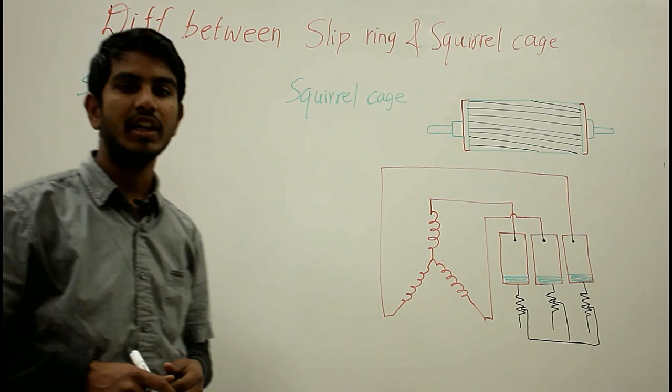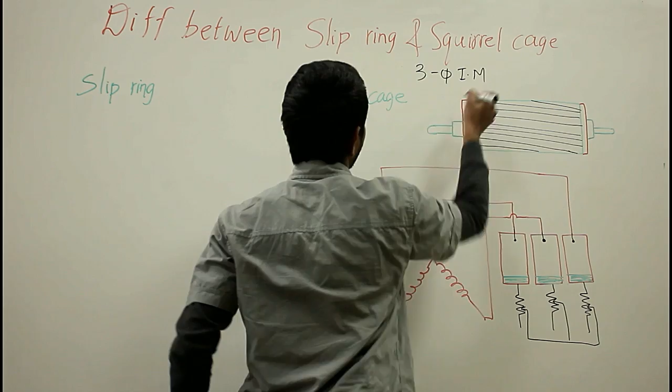Hello friends, in this video let us discuss the differences between the slip ring induction motor and the squirrel cage induction motor. If you look at the basic construction of the slip ring rotor and squirrel cage rotor, three-phase induction motors, depending on the type of rotor used, are classified into two types. One is the slip ring type of induction motor and the other one is the squirrel cage type of induction motor.

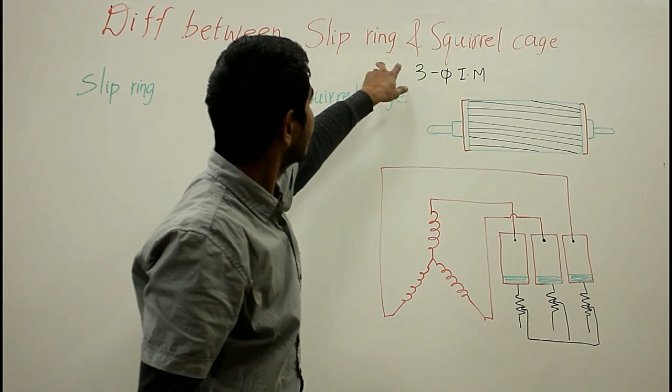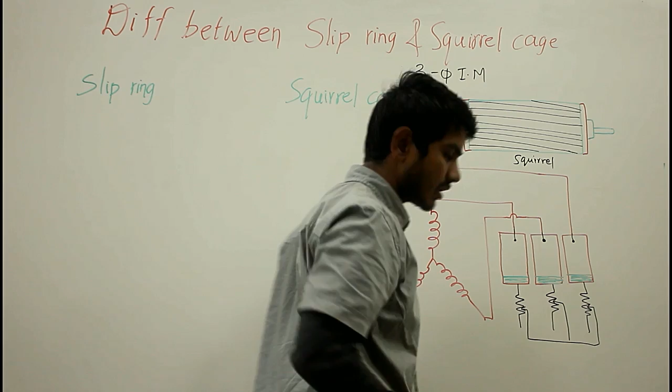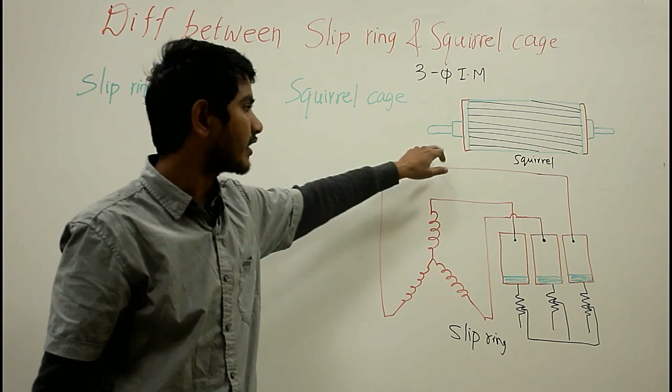Now, based on these two rotors, our induction motors are classified. If you look at the very basic construction of these two rotors, this is your squirrel cage type of rotor and this is your slip ring type of rotor. So if you are employing a squirrel cage type of rotor for your motor, it is referred to as a squirrel cage type of induction motor, and if you are employing a slip ring type of rotor, it is referred to as a slip ring type of induction motor.

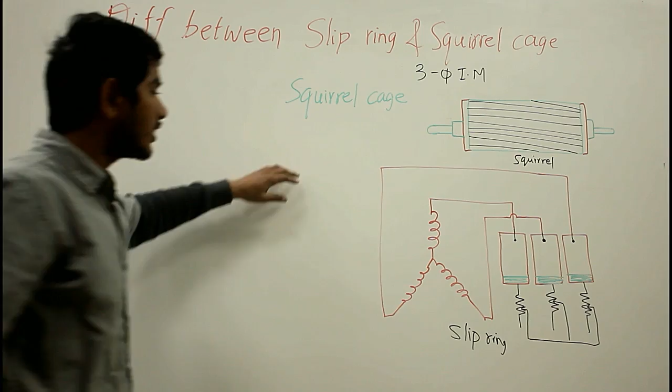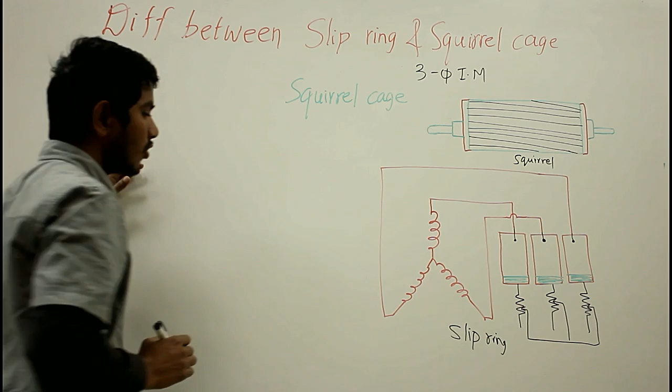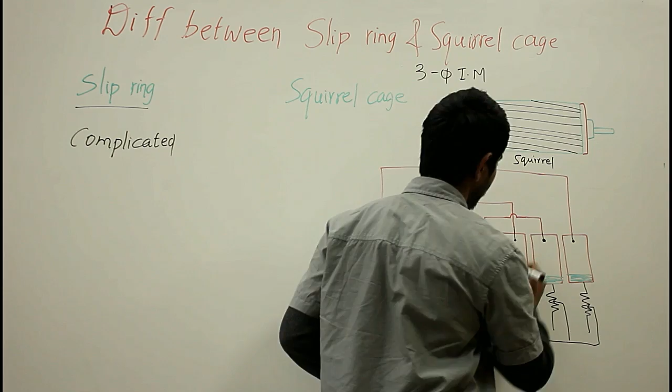Now let us discuss the basic differences between the squirrel cage type of induction motor and the slip ring type of induction motor. Generally in the slip ring type of induction motor, the construction is complicated because of the presence of slip rings. If you look at the parts of the rotor used for the slip ring type of induction motor, here you have three slip rings, and this green part represents your carbon brushes. So the construction is complicated because of the slip rings and the brushes, and here the construction is simple and rugged.

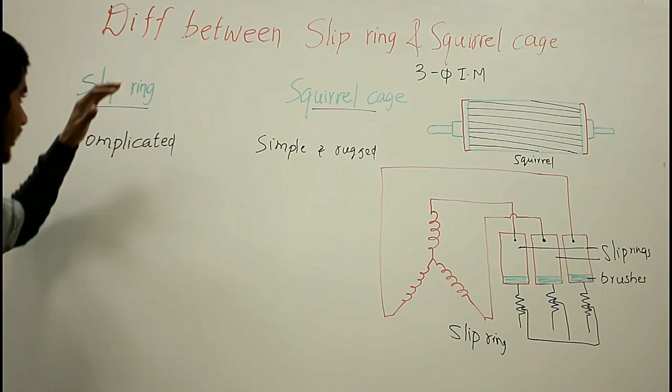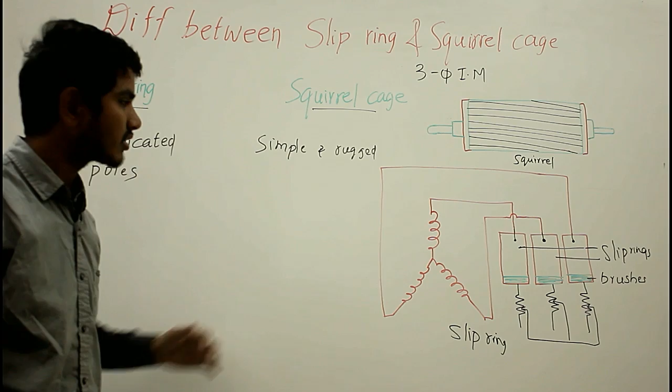In the slip ring type of induction motor, the rotor is wound for the same number of poles as that of the stator, but in the squirrel cage type of induction motor, the rotor automatically adjusts to the poles of the stator.

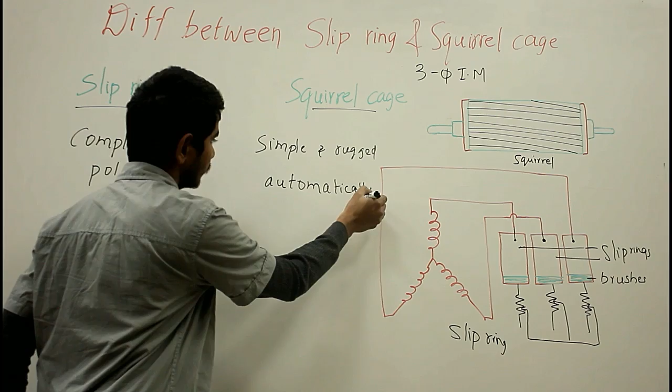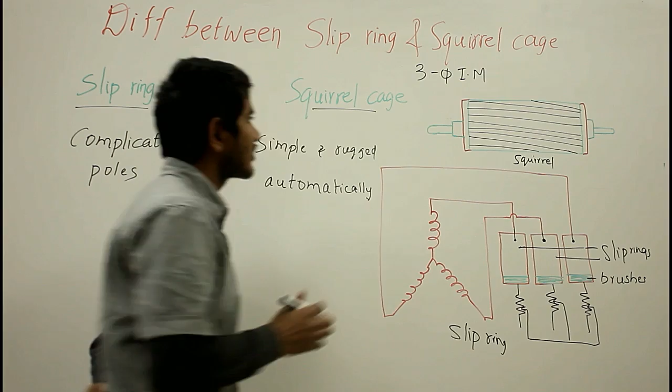Generally in squirrel cage motors, the three-phase windings wound in the stator are delta connected, because mostly the starters used for squirrel cage type of induction motors are star delta starters. Hence, the stator of your squirrel cage type of induction motor is delta connected.

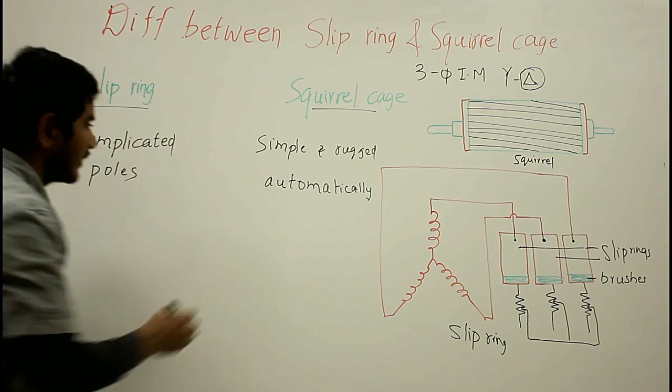So for both types of motors, that is the squirrel cage type of induction motor and the slip ring type of induction motor, the stator part is the same. The parts of the stator are the same; only based on these two rotors we are classifying the induction motors, and the stator remains the same for both motors.

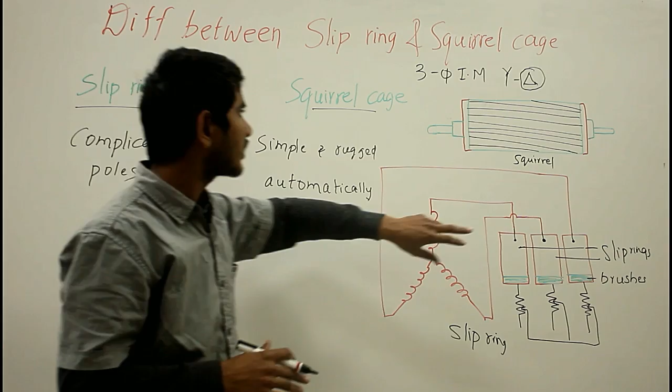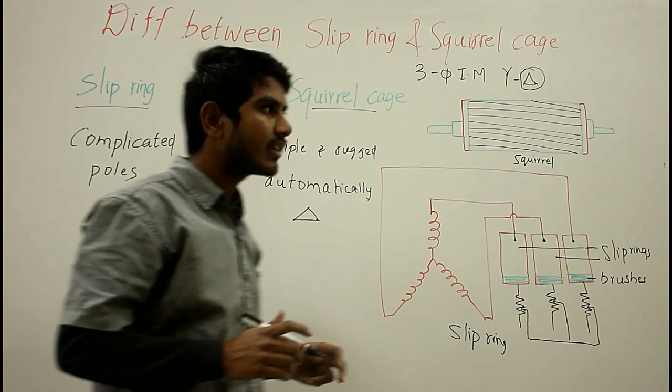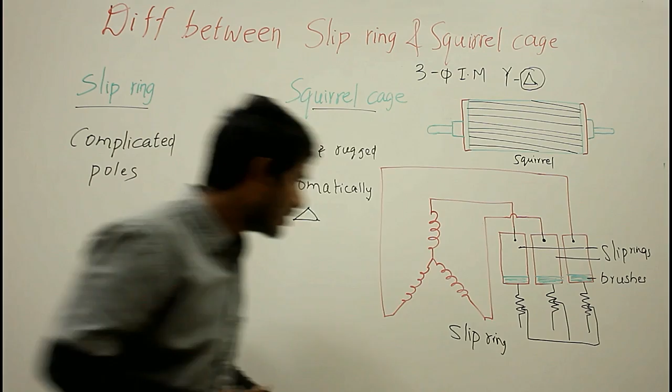But depending on the type of starter, the windings can be delta or star connected. Mostly for the squirrel cage type of induction motor we go for star delta starters, and hence your stator is delta connected to reduce the high starting currents. For the slip ring type of induction motor, the starting can be done by employing external resistances, so your stator can be either delta or star connected.

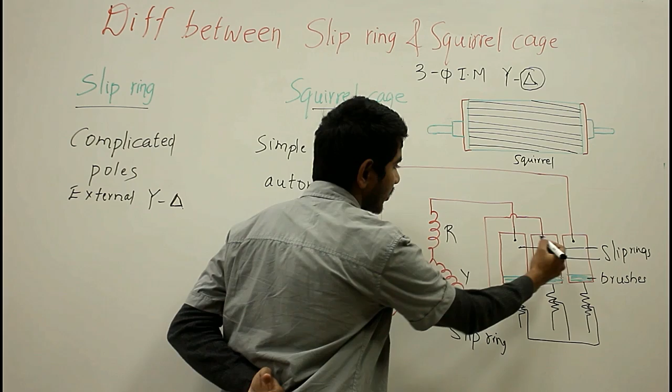In the slip ring type of induction motor, as the name suggests, the rotor windings are permanently connected to the slip rings. And if you look at the squirrel cage type of motor, the slots are slanted in order to prevent magnetic cogging, that is, magnetic locking between the rotor slots and the stator slots. They are slanted, meaning they are neither perpendicular nor parallel to the axis of the shaft. They are oblique in angle.

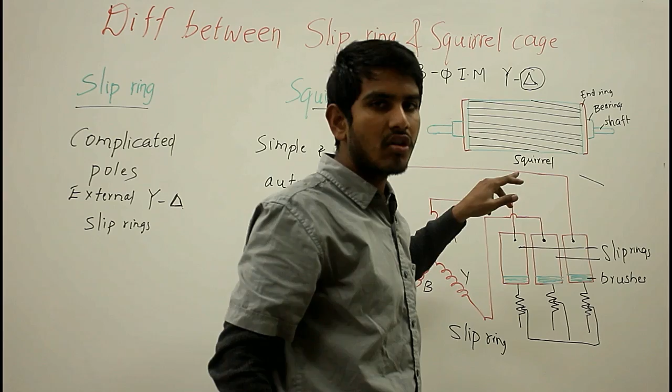So this is your shaft, and here are your bearings to support the rotating shaft, and this is your end ring, and here are your slanted slots, and in those slanted slots we use aluminium, brass or copper bars.

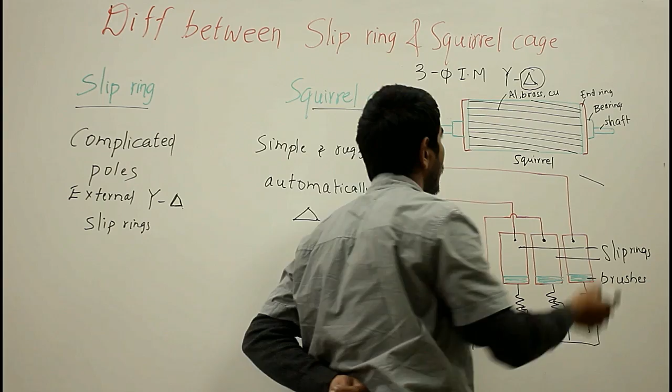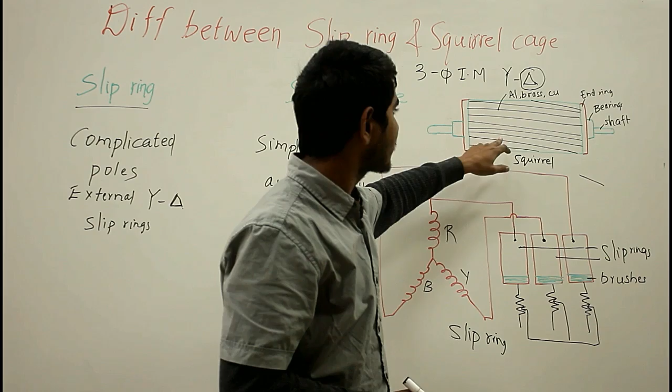Copper, you can say copper conductors or rotor bars. Now, the slots are slanted in order to reduce the magnetic humming noise, to overcome the effect of cogging and to avoid the stalling of the motor. The slots are skewed and the conductors are placed in those skewed slots. So here the slots are skewed, and in the skewed slots we are using our conductors.

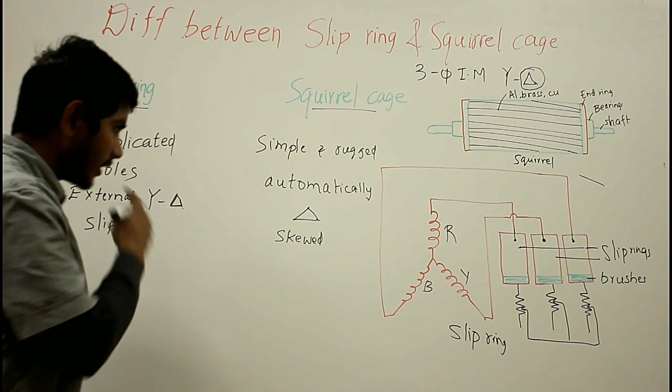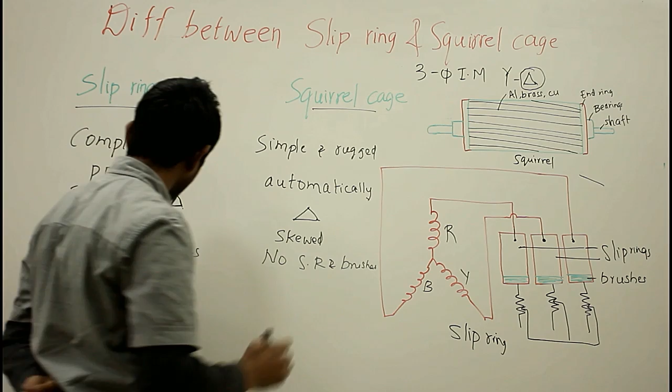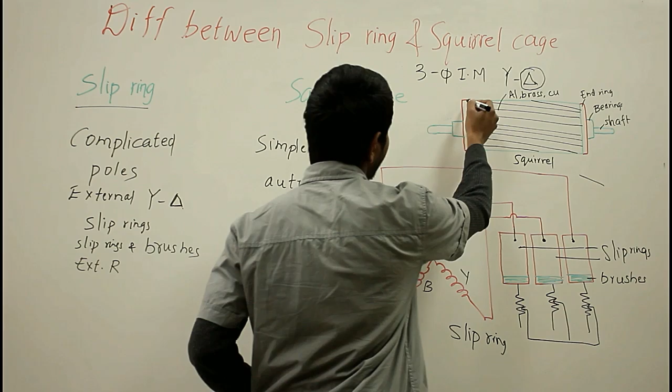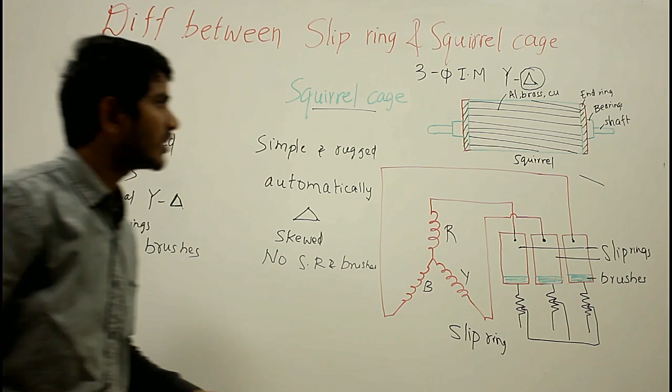And here if you see, we are employing both slip rings and brushes to connect the external resistances. Here, no slip rings and brushes. So external resistance can be connected to your slip ring type of induction motor. Here the rotor bars are permanently shorted with the help of end rings. So here are your end rings. As the rotor bars are permanently shorted at the end with end rings, there is no possibility to add external resistance.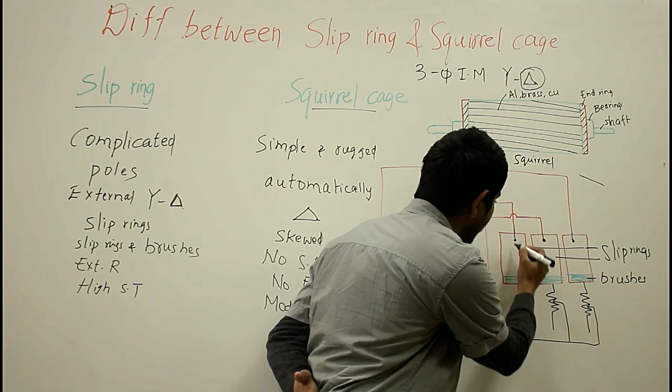Now this external resistance helps in achieving high starting torque. High starting torque, and here moderate starting torque, and it cannot be improved because we are not having any external resistance here. So because of the presence of the external resistances, which are star connected through the slip rings and the brushes, we can go for good speed control in your slip ring induction motor. So we can have better speed regulation or speed control, and here speed control is not possible.

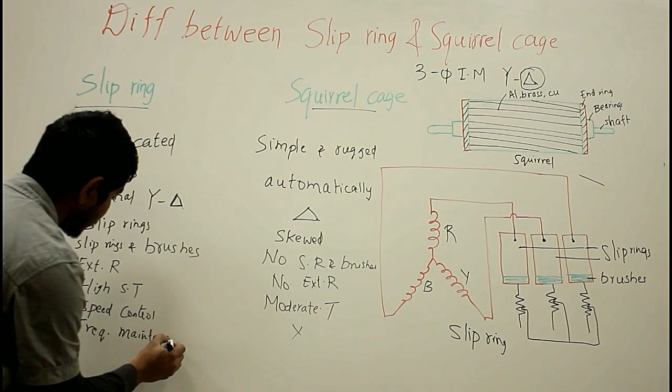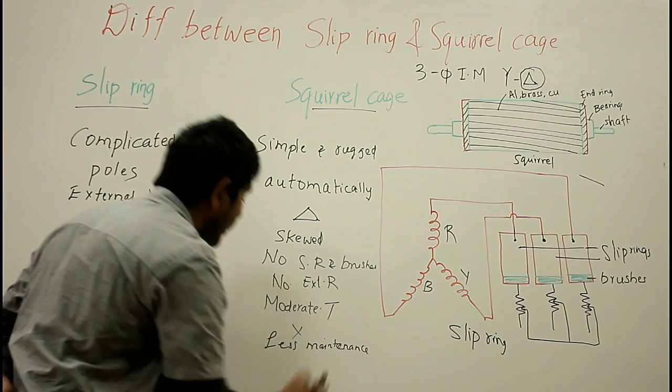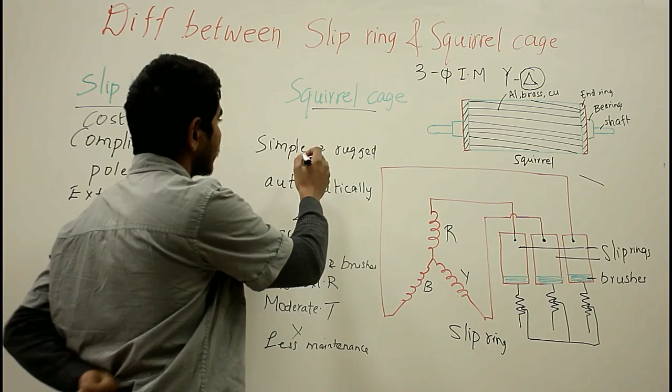Because of the presence of the slip ring and brushes, the construction is complicated and frequent maintenance is required, because of the sparking which is taking place in the brushes. Here less maintenance is required. And because of the slip ring and brushes, your slip ring type of induction motor is costly. As the construction is very simple here, robust construction is seen in the squirrel cage type of induction motor, and these motors are very cheap.

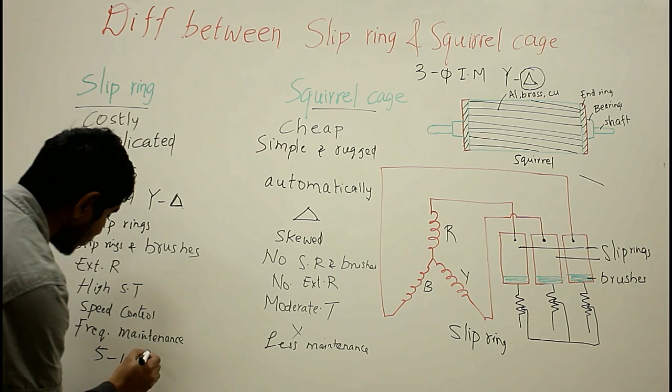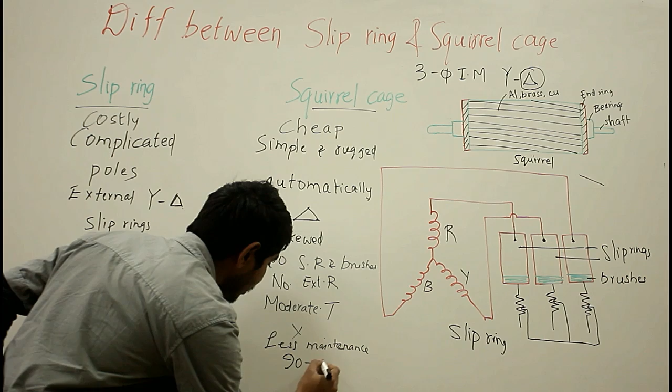So in industries, only 5 to 10% slip ring induction motors can be seen. That is, they are rarely employed in the industries. Around 5 to 10% only you can see the slip ring type of induction motor, because they are costly, the construction is complicated and frequent maintenance is needed. But here you can experience 90 to 95% squirrel cage type of motor in industries.

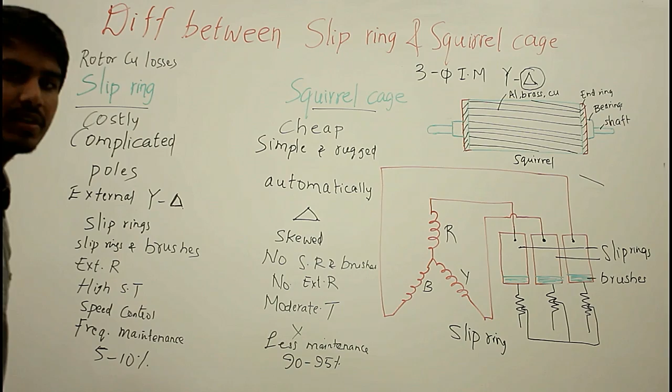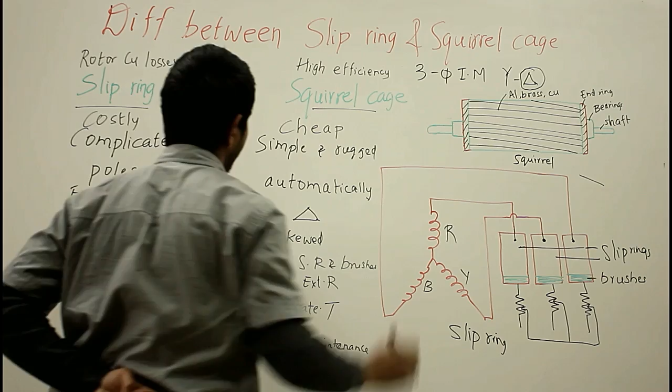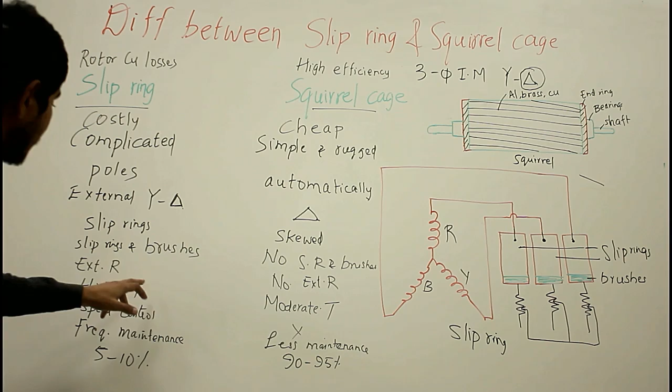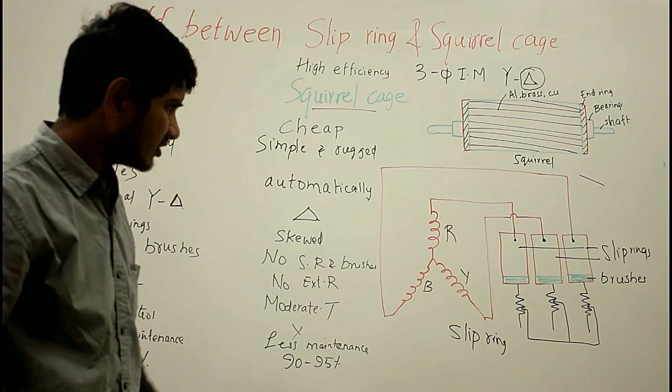And for your slip ring type of induction motor, the rotor copper losses are very high, hence the efficiency is less. Here the rotor copper losses are less, which means high efficiency in your squirrel cage type of induction motor. To summarize the differences: here we have high starting torque, here moderate torque, and we can reduce the high starting current through these external resistances. The slip ring and brushes make the slip ring motor costly, complicated, and frequent maintenance is required, with high rotor copper losses meaning low efficiency, and here we have high efficiency.

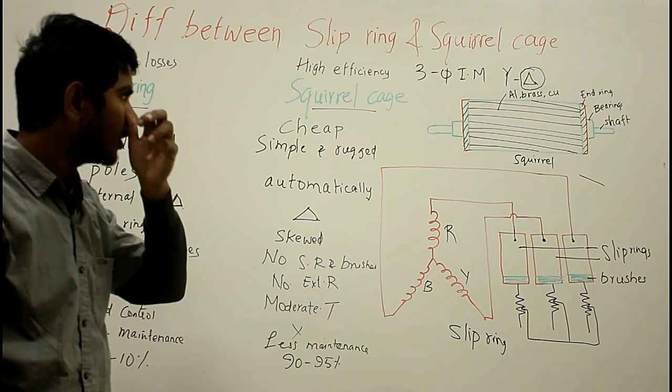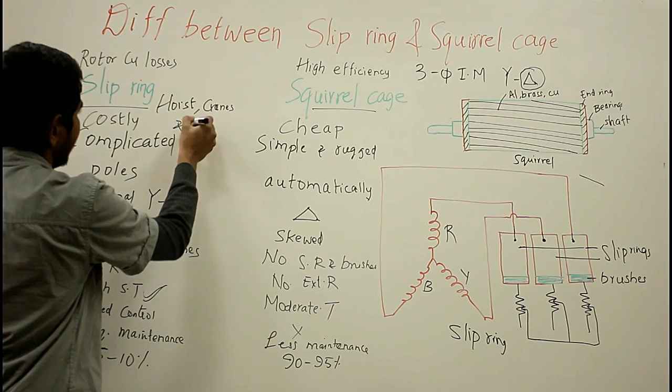As for applications, slip ring type induction motors are employed where we require high starting torque, so hoists, cranes and lifts. Squirrel cage type induction motors are used in lathe machines, drilling machines, blowers, fans, and printing machines, etc.

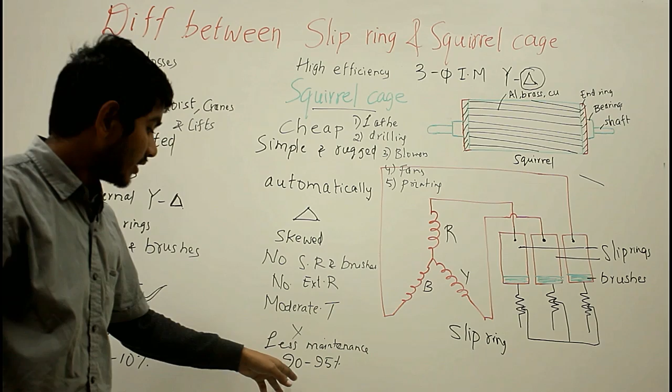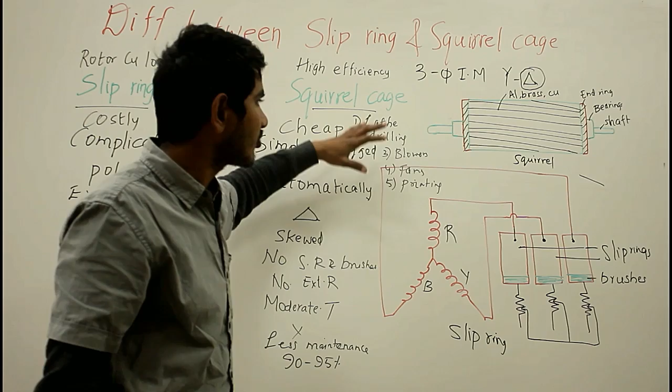Because of their high efficiency, cheap, simple and rugged construction, less maintenance is required, and they do not have slip rings and brushes, 90 to 95% of them are employed in industries. So these are the overall differences between slip ring type and squirrel cage type of induction motor. So I hope you have understood well.